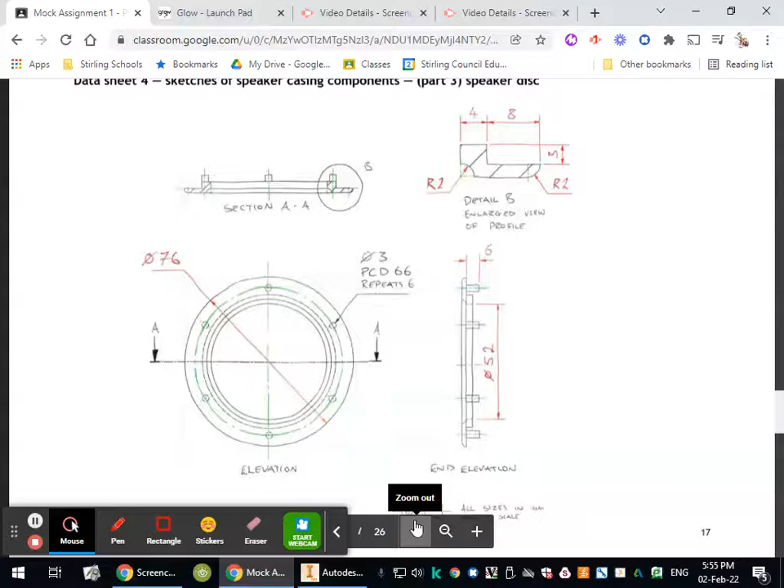So with this next part here, which is part 3, we have a pretty straightforward part to model. Looking at it, the thing that we want to identify is that we've been given an enlarged section of a part of it, which is quite often a clue that it's going to be a revolve. And because this is an axially symmetric part, that is to say down this axis in the center here, it's symmetric across both sides, and it's circular, which means it's perfect for a revolve.

The only thing that we can't do in this with a revolve are these pegs here that stick out, but that's fine because it'd be easy to add them on afterwards as an extrusion. So we'll turn our attention here, make sure that we understand the profile that we need to draw, and we also need to figure out where that's going to go in relation to the axis that we want to revolve

it around. So it looks from this as though the diameter 52 here relates to the size of the hole in the middle. So that basically means that this edge here, which is the edge of the hole, has to be half that away from the axis. So it's going to be 26 millimeters from the edge of this part here to the axis. And then we just need to sketch this and revolve it around 360 degrees. You could probably go about doing this through extrusions and other ways, but it would be a lot more hassle. So let's not do silly things like that.

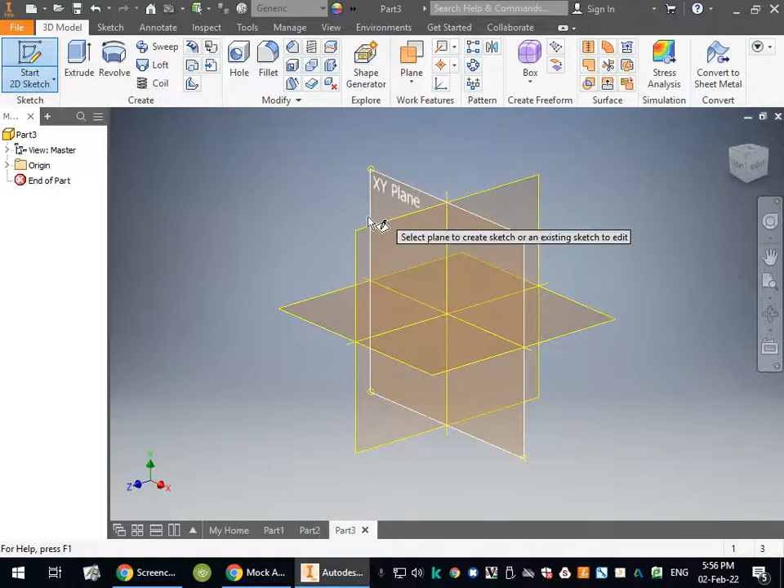So again, back to Inventor, we'll make a new part. And again, we want to think about what plane we're going to sketch this on. And because it's going to revolve around, I want to sketch it on this plane here so that when it revolves, it comes around and it's still orientated the way that I want it to be. And I'm going to move this so that it's, again, orientated sensibly for what I'm trying to do.

So I'm just going to start by doing a construction line up at the top here to be an axis. Doesn't really matter what length it is. We could actually make that a center line, to be fair, rather than a construction line. So that's going to be our axis that we're going to revolve it around, and we need to start the sketch by doing this first line here.

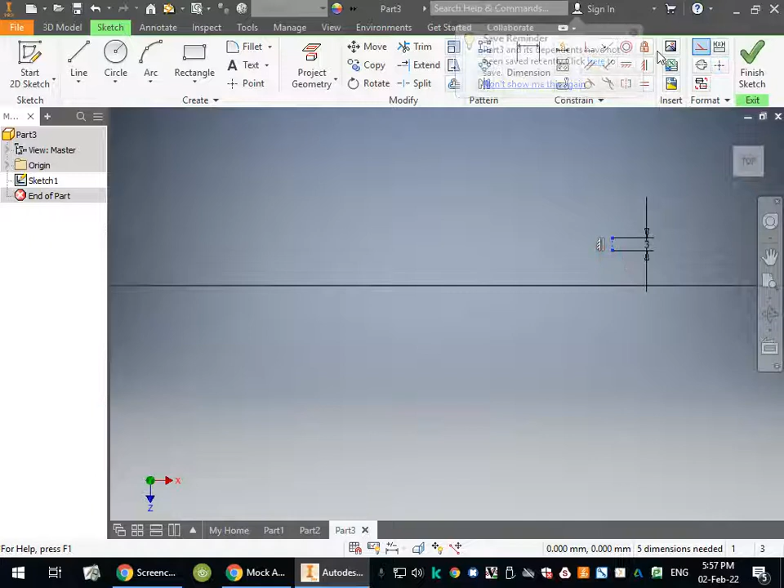And looking at this, it would appear to me that that bit there is going to be 3 millimeters tall, because we can infer that from here in the fact that there's a radius 3 there. So we will start with just drawing a 3 millimeter vertical line. And don't have to be too precious about where we draw it, just anywhere over here. Oh, I want to start by drawing it the right way around. So try that again. Okay. And we'll just highlight that and make it a construction line.

And the next thing I'm going to do is specify the distance from this to my axis to make sure that it ends up being the size that I want it to be. Oh, I think it's given me that as a diameter because I used a center line rather than just a normal line. In your case, if you're just using a normal line, you'd probably just use the radius, but for us that's 52, so we'll put in 52. And that's it, positioned now the correct distance away from the center.

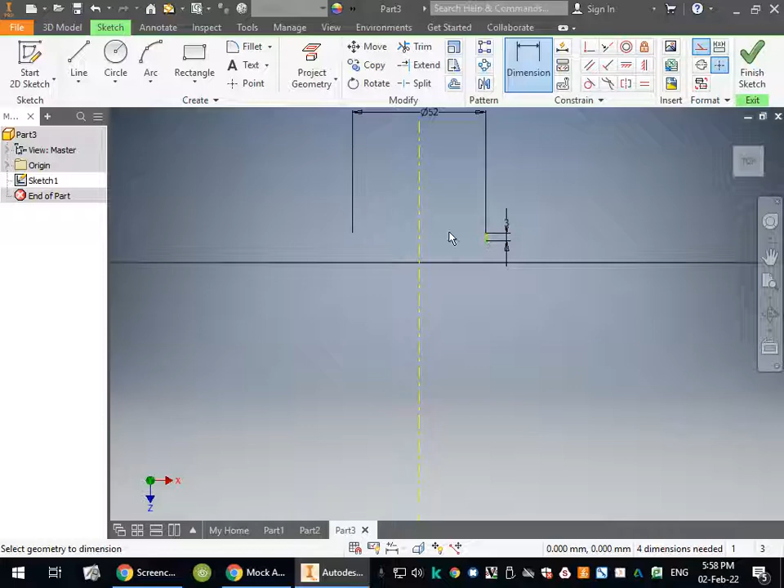So I need to continue that sketch by doing this line that's 4 along the top, then 3 down. So let's continue with that. So from here, 4, and then go down 3. Just going to move that dimension over to the other side so I can see what I'm doing a little bit better. To turn off the construction line, that's something that's going to keep tripping me up.

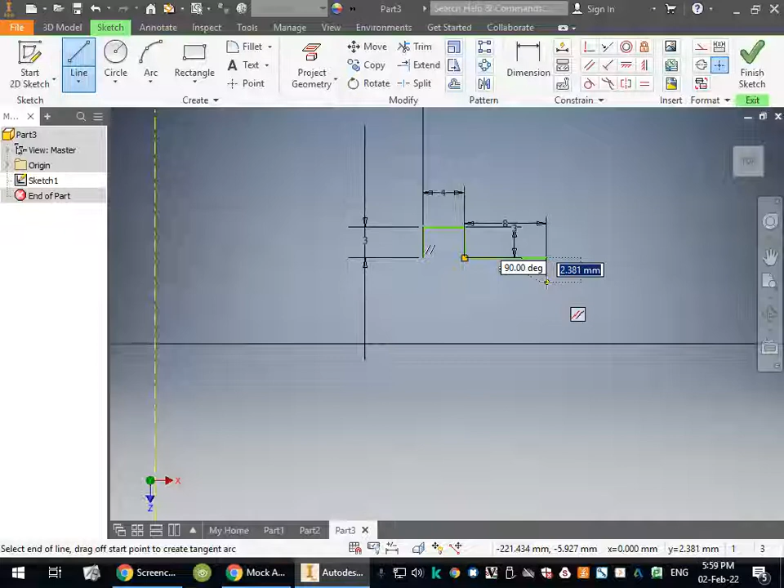Making life difficult for myself here. So 3, and then this distance here is 8. Disable construction line before I do that again. And then down here and in, so at the bottom of there we want a kind of an arc that's going to give me like a quarter of a circle. So just here, what I'll do is I'll just draw this 2 millimeters down, and then tie this all up afterwards.

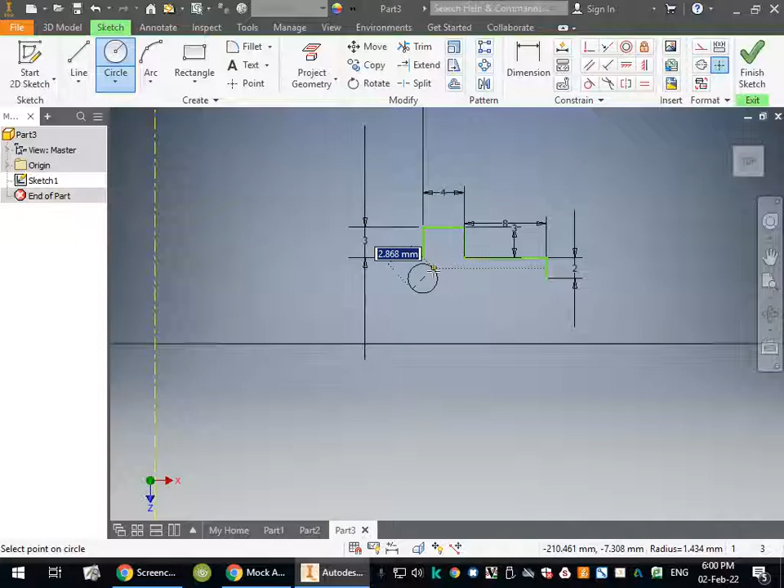So I think the easiest way to do this would probably just be to do a circle here. You could do it with the arc tool though, it wouldn't really matter. And make sure that my center point, I'll just go over that again, center point of my circle has got a trace line linking it to there and to there. So I know the center is here where it needs to be. And then I can just stretch out to there, and we can see 4 millimeters, that means the radius will be 2, so that's fine.

I can take my line from here, bring it up till it hits the edge of it, and then I can use the trim tool, so that's shortcut X to cut that away, and I could use the fillet tool to do radius fillet there, 2. So we've now got 8, 2, 3, so let's just check, 4, 8, yep, we've got all the dimensions that we need, so that should be exactly the size and shape we want it to be.

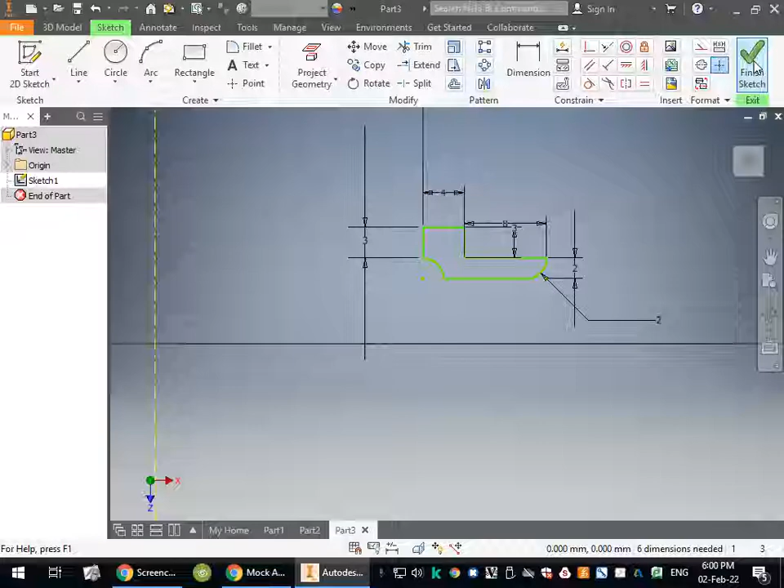So all we need to do now is revolve that around. Just double check, yep, that's all we need to do. So we'll finish that sketch and we'll revolve it. So the handy thing about using a center line when you're doing a sketch with a revolve is it knows that that's the axis, so you don't actually have to select it yourself.

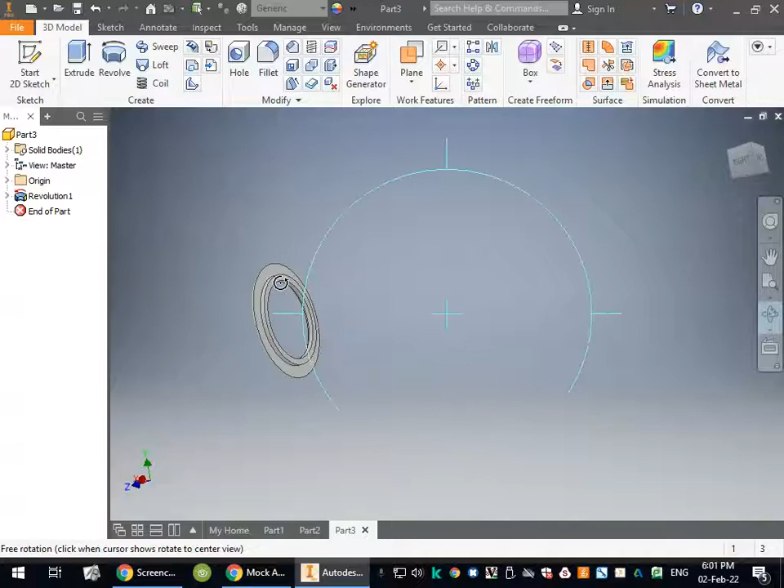Okay, so that's that. Now we just need to put these pegs on the back of it, so they sit on the flat back surface at the back here. So they're going to go into that surface there. And I want 6 of them again because they've got to match up the other holes. They are 6 millimeters deep and they have a diameter of 3 millimeters. So we'll start our sketch on here.

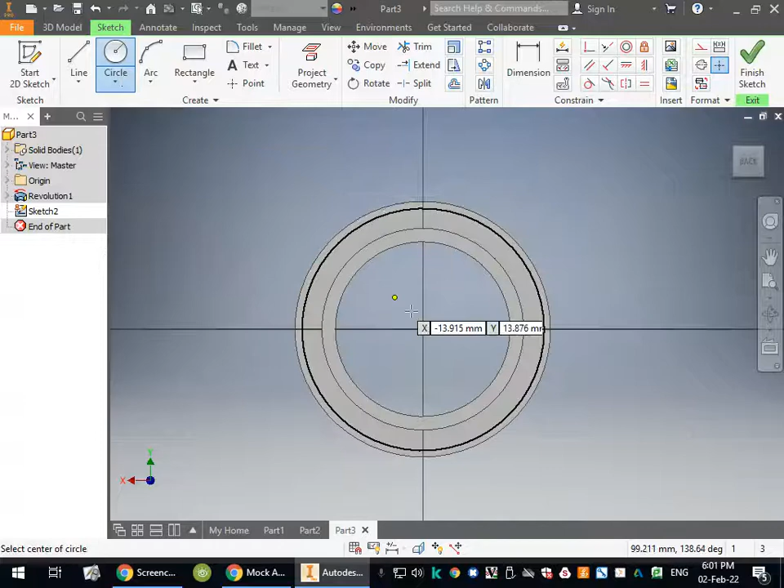We will do our circle, and we want to position this. Where does it need to go? How far down? So it's a PCD 66 as before. So we'll do a circle. It's construction line. We'll make that 66. Probably should actually use a center line for that construction line as well, because that would be more appropriate for a PCD, but don't worry about that just now.

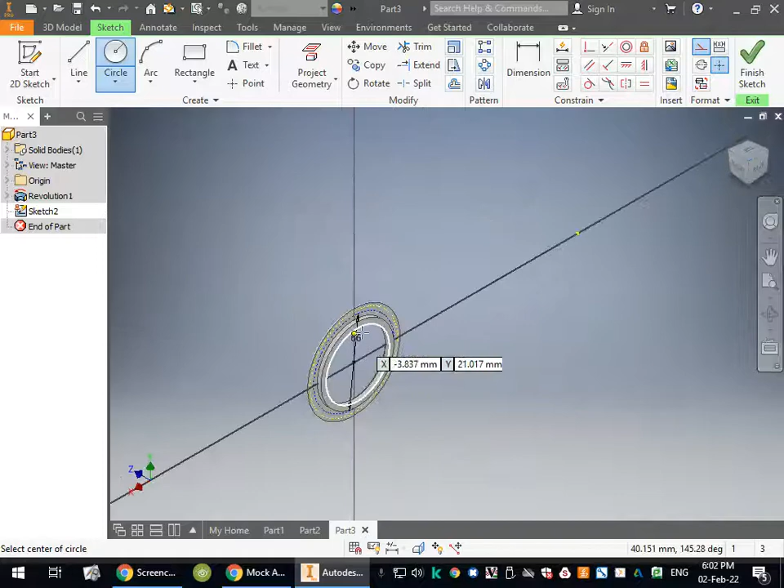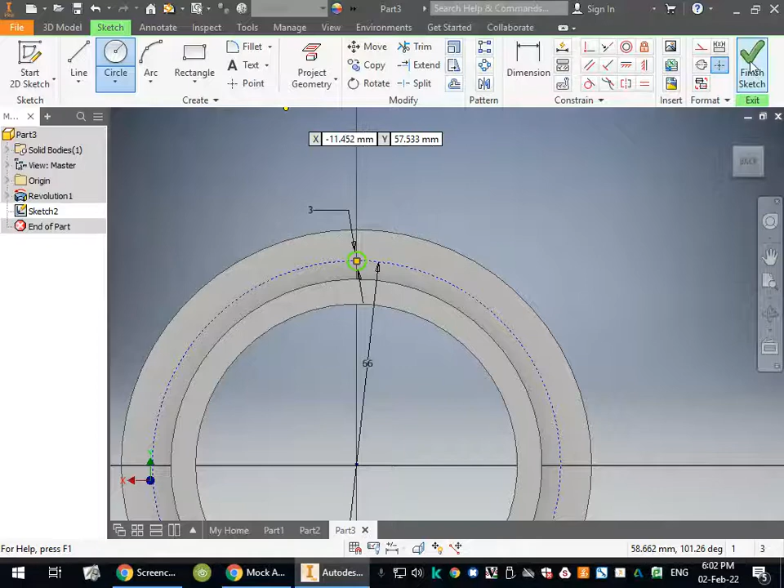And then we're going to do a circle. Let's try and figure out why we've got a second line there. Must have created that by accident. Yeah, so we'll do another circle here. So that's going to be 3 millimeters diameter. Make sure we've unticked construction line. And we are going to extrude that 6 millimeters and then use a circular pattern around any of these curves as an axis 6 times.

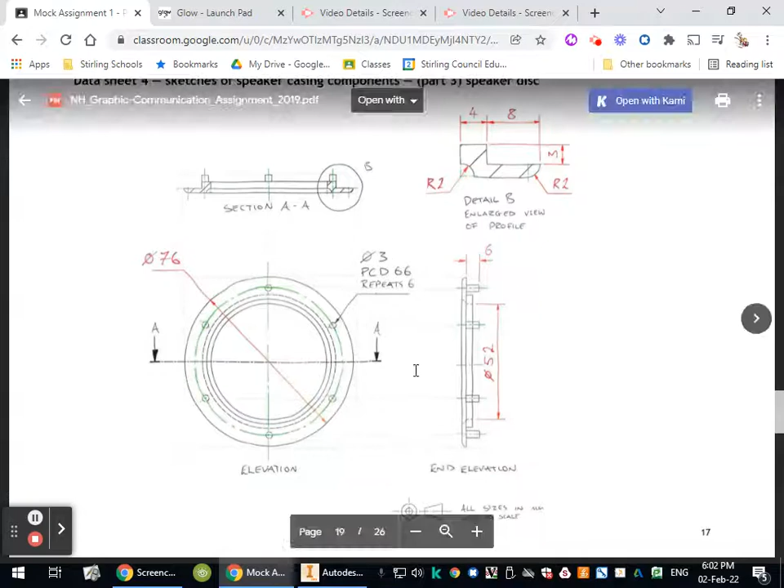So there are no other details here that I can see that we need to add. I think we've taken into consideration everything that's there. So that's that part done. Move on to the next one.